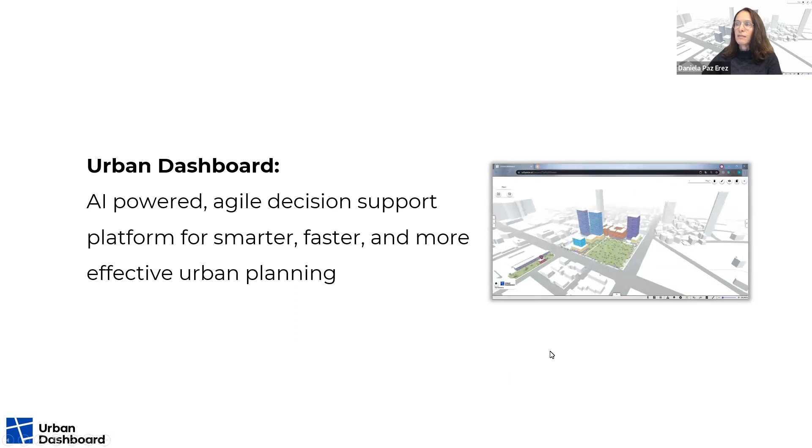So, Urban Dashboard. It is a decision support platform for smarter, faster, and more effective urban planning. Our mission is to empower planners and collaborate with a platform that can help analyze in a very early stage of planning. The platform currently is in an advanced developed stage, and we will talk about what it can do and how. But first, let's talk about the process of urban planning.

The complexity of urban planning is very complicated. The stakeholders are different with different interests - the developers, the state, the municipality, the public. Each and every one of them has different needs, and each stakeholder maximizes benefits from a different aspect. The planner or policy maker that needs to approve the plan must coordinate with all these interests, address everyone, and align the interests. The amount of data and aspects dealt with are huge.

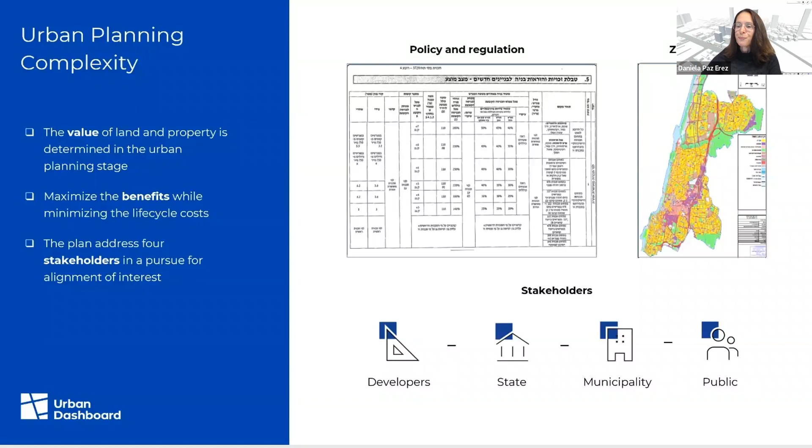And it is going to get much more complicated. The future of planning cities we are looking at is going to be different in a lot of aspects, like future mobility that changes the way we drive and commute. We can look at the future of autonomous cars, electric vehicles, and the challenges of changing the roads because of that. And also the workforce of the future, looking at the mixed use needed because people work from home and need different facilities near their house.

And of course, the housing crisis that's increasing all around the world, and the need to agile the zoning - all of that is creating a huge need and challenging the planners and the people that deal with this stage of urban planning. We cannot think that we can plan the future cities with old tools.

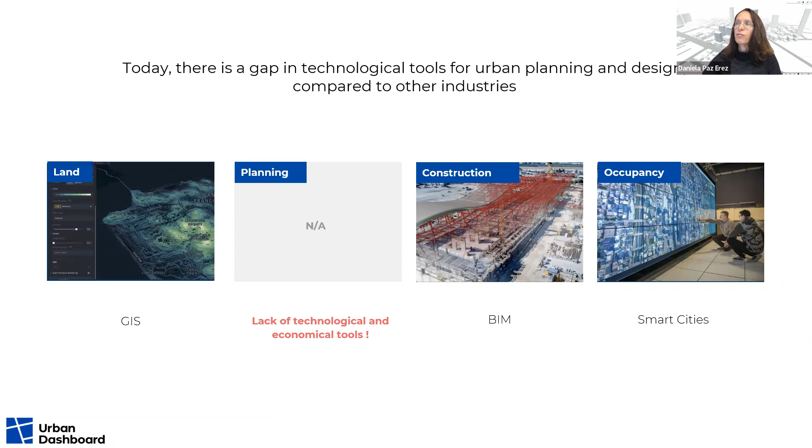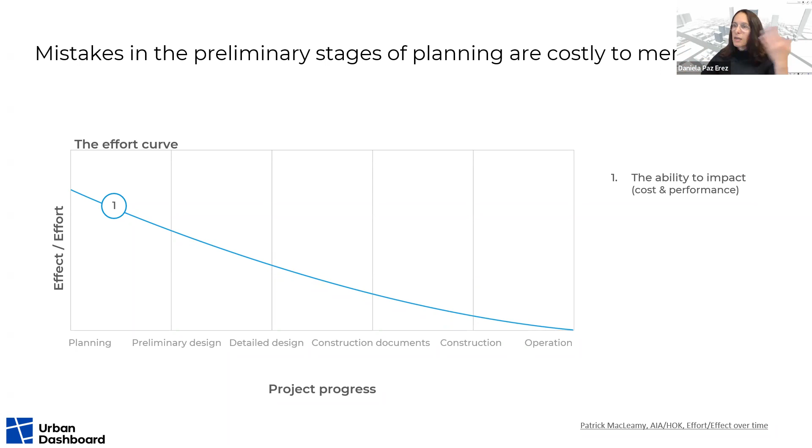Here I want to show you how important it is to use tools, or to know the effect of urban planning, in early stage. Here you can see the blue line that shows the ability to affect at early stage compared to the late stage or the operation stage. You can see that the ability to make changes at the end of the process is almost zero. And at the beginning, we can change almost everything we want, and the cost is almost nothing.

If you want to change the location of a road in the beginning of the process, it means to draft another version by the architect. But if you want to do it after the road was paved, it will cost you demolishing the road and paving another one.

If we see the CAD tools that were used 20 years ago, these technological tools dealt with the construction and the detailed planning, and helped the architects and planners in that stage. In the last few years, we see BIM, building information modeling, 3D models that help the detailed design and the preliminary design stage. And now we want to offer a solution for the early stage, the urban planning stage, when you do only the zoning.

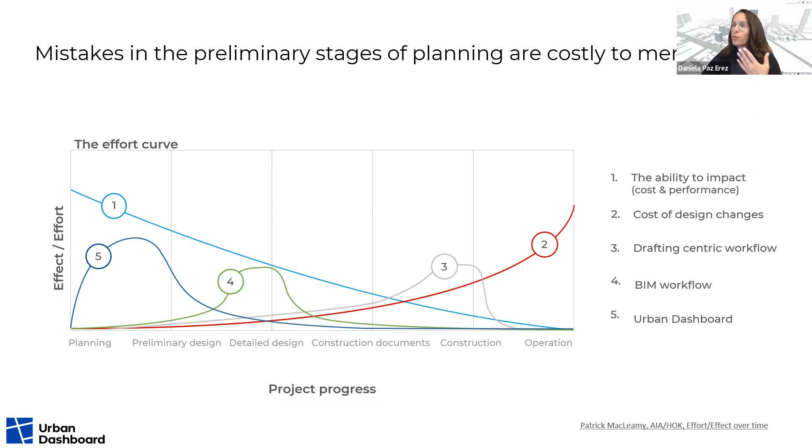Now I want to talk about the cost of urban planning bad decisions, or not knowing the outcomes at the beginning, with two examples. The first one is in Harish, Israel. It is a major new urban center of over 100,000 people, population very large, and needs a new road.

The planners decided to pave a road 50 meters wide on a hilly region, on the side of a mountain, and the cut and cover of the road cost a lot. It doubled the levies, or the infrastructure cost, in this area.

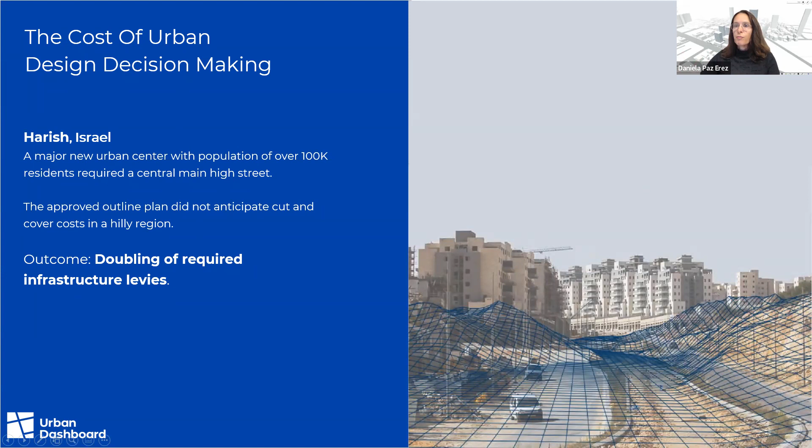We tried to find a different solution by using our tool, Urban Dashboard, and we found that using Urban Dashboard in an early stage would have saved a lot, by changing the location of the road, or a different solution for transportation, like splitting it. This is just one example showing that knowing this at the beginning probably would have changed the way the planners decided to give the solution for the problem of transportation.

Another example is in Kiryat Gat, Israel. It's a city in the south where a new neighborhood of 7,000 units was planned, and the layout was high-rise alongside townhouses. This is a neighborhood that was supposed to give a solution as affordable housing for 7,000 families in Israel.

The government, or the planning authorities in Israel, asked us to try and find a different way of layout in this neighborhood, in order to see if they could save money by changing the buildings that were planned. So we did an examination, and we found out that changing the plan to low-rise, not high-rise, not townhouses, low-rise buildings with the same amount on the same land, with almost the same quality of life, could have saved 20% of the cost of each apartment.

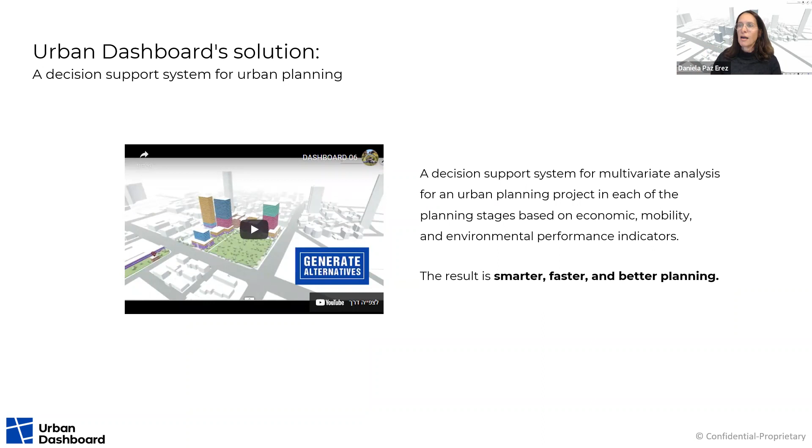I will share a short movie to emphasize how it works.

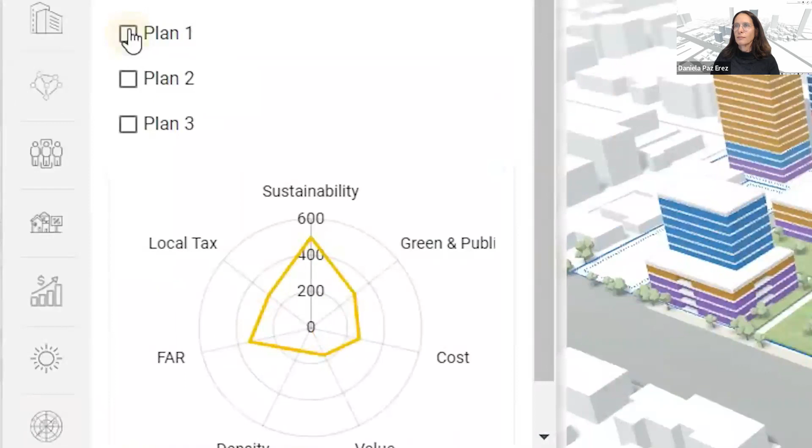Okay, so we want to transform the way cities are planned. And the core features of Urban Dashboard - the first one is the site analysis.

We provide a lot of data layers in each geography that Urban Dashboard can work on, and the user can do a very quick site analysis and find out a lot of regulations and restrictions that are relevant to the plan that is looking at.

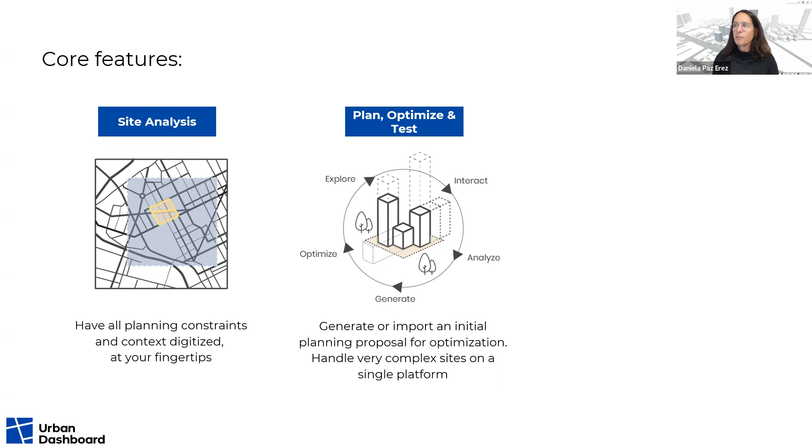Then it can plan on the platform, as you see - Urban Dashboard allows you to plan on the platform and also import your plan, and then explore it, optimize it, and analyze it in a lot of aspects. Then you can see the results for each and every scenario and compare the alternatives, and also present your plan or alternatives to the decision makers or others interested in the results.

In early stage, Urban Dashboard can be used both for developers, urban planners, consultants, managers of projects, and also academy and students.

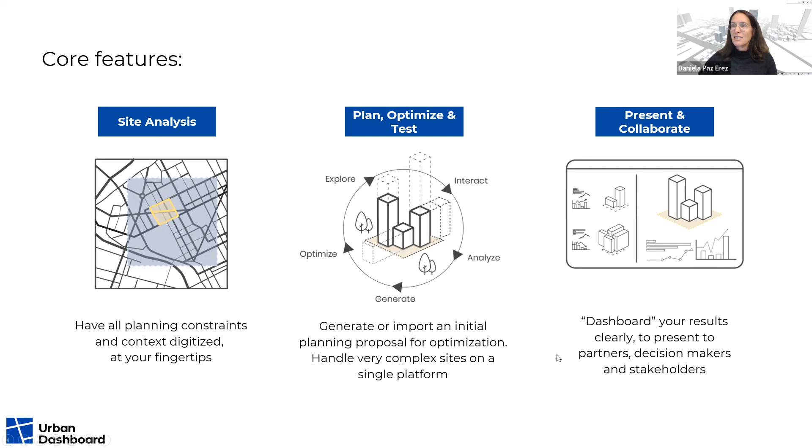The analysis that we are providing has 4 core aspects: economic, mobility, sustainability, and infrastructure. The economic indicators are the construction cost, the cost of parking, the value of the tradable areas, and program for the public needs, and so on.

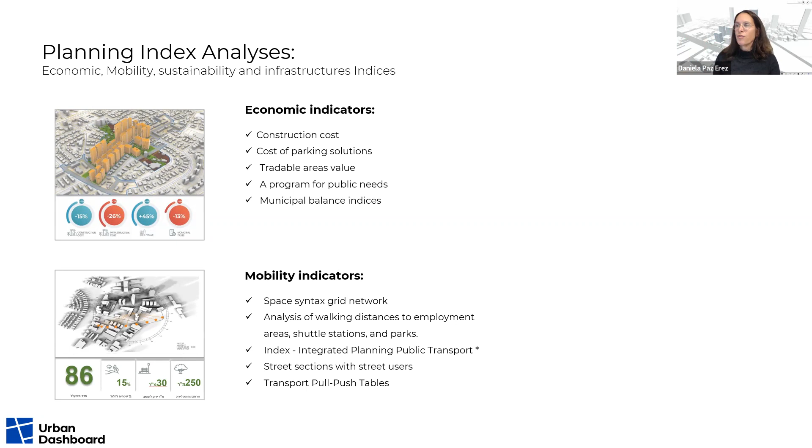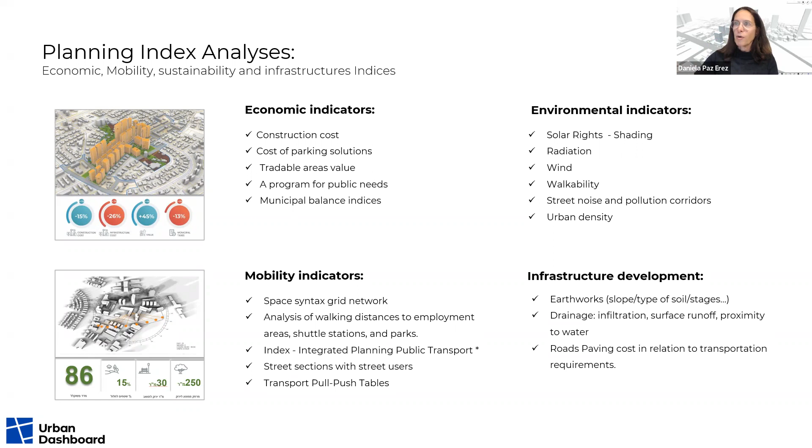The mobility indicators show the space syntax grid network and other aspects of transportation, like a street section with the street users. The environment indicators deal with solar rights, shading, radiation, wind, walkability, and other factors. And for infrastructure development, we are looking at the earthwork, the slope, the type of soil, drainage, and road paving cost. I will talk about it in my examples in a minute.

So in order to understand the power of this tool, I want to show you a few case studies. The first one is the use of Urban Dashboard by a group of planners working on a metropolitan metro system above-ground plan in Israel.

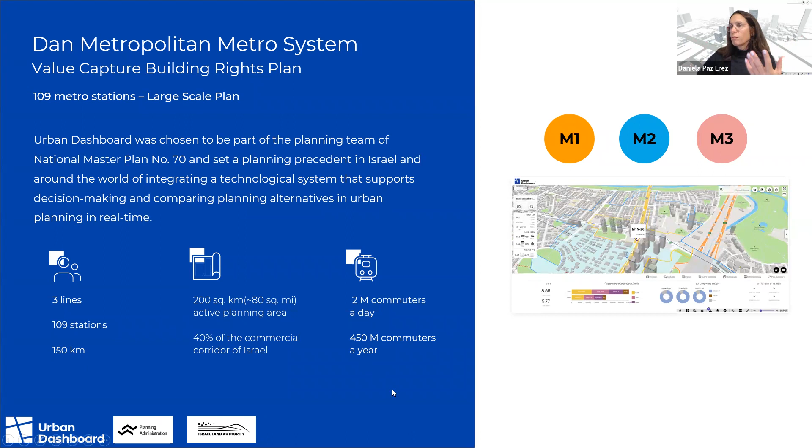In Israel, we don't have a metro. We are just planning it right now: 3 lines and 109 stations covering 150 kilometers. The above-ground area affected by the metro, the immediate area, is 200 square kilometers. It is a huge plan, covering 40% of the commercial corridor of Israel. Urban Dashboard was the platform used to plan and examine the above-ground area.

I will show you one aspect that we did. What you see here is an example of 7 metro stations within one line, forming a cluster. First, Urban Dashboard created a layer of all the parcels, shown below. Then we imported the station centers and the entries of each and every station.

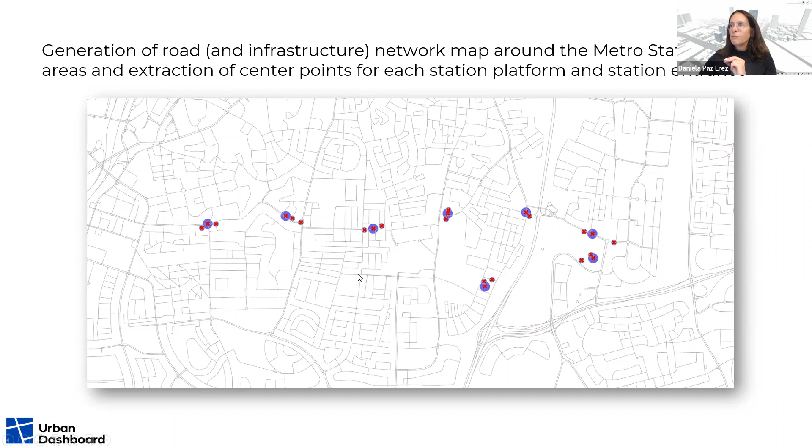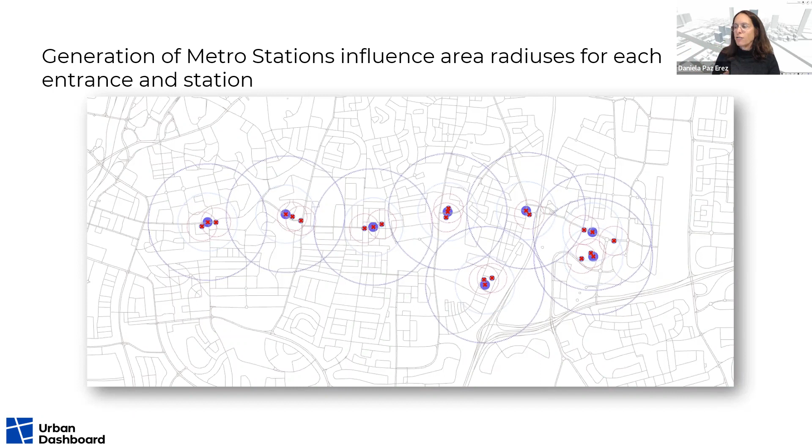Then we marked radii of 300, 600, and 800 meters, and 150 meters radius from each station entrance. We then ran an algorithm that created influence area polygons surrounding each and every station, based on a set of guidelines and constraints regarding the lots and buildings surrounding each station. This was done for all 109 stations.

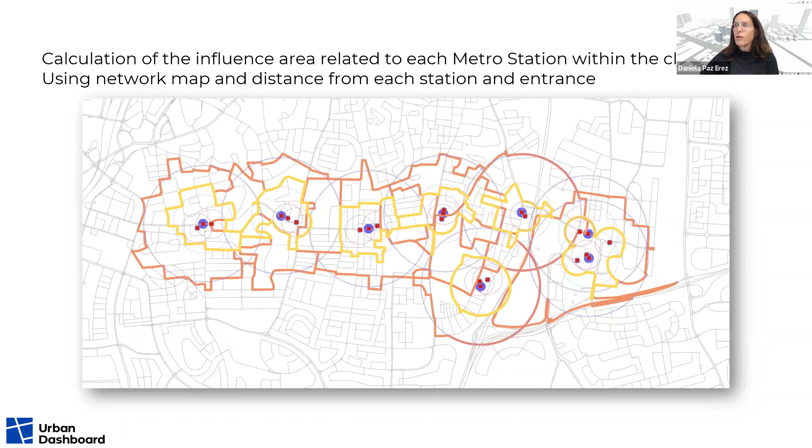I believe that if people needed to do this by hand, it would have taken much more time. It is automatic, and if you change the construction, the algorithm changes the area in a minute. That was very helpful for the team planning the above-ground area. This is only one example of what they did, but the team's work spanned a lot of aspects, and Urban Dashboard was very useful for them.

Without a technological tool like this platform, it would have been very difficult to deal with the huge amount of data needed for a plan like that. The complexity was very high, and Urban Dashboard helped a lot. The result was generating the surrounding area for each of the 109 stations according to all the local constraints and needs of each municipality, and we are proud of that.

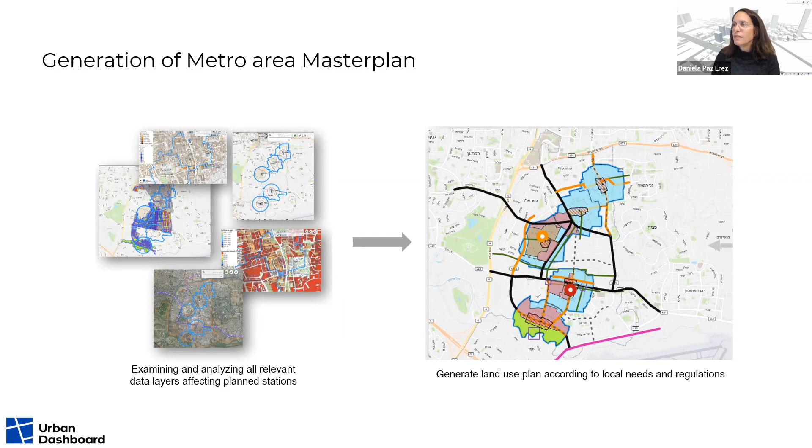Another example deals with water management. A new neighborhood was planned in a city called Or Akiva in Israel. As you can see, a river runs along the development site, making it flood prone. The planning team proposed raising the entire neighborhood by 3 meters to avoid future floods. We ran an Urban Dashboard model to check whether there's another solution that doesn't require raising the whole neighborhood, and we found that yes, we can.

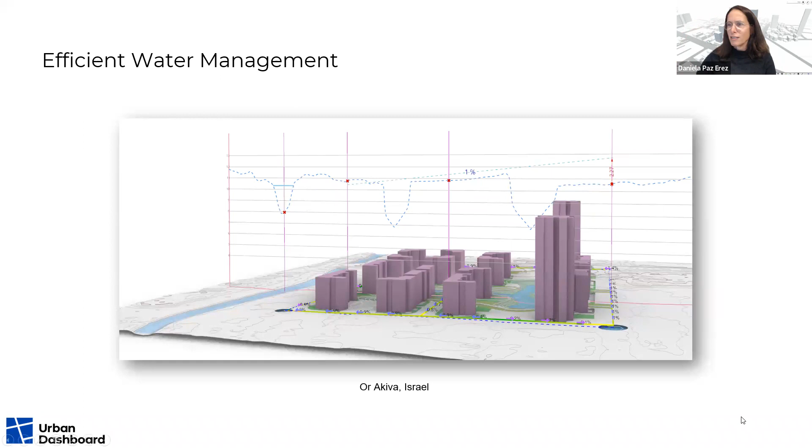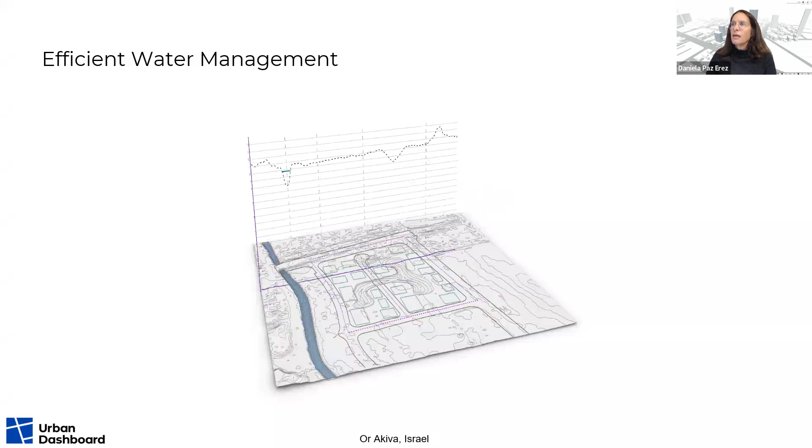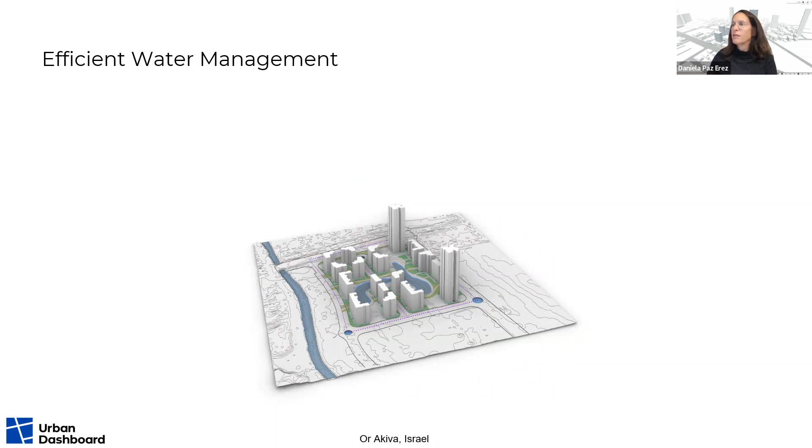Here I can show you the model of what we did. You can see the river and the topography, the flood area, and then after the model ran, we knew how to change the buildings so that the area in the middle can absorb the water.

Another important case study was made for ARIM, a government real estate infrastructure development company in Israel. The goal was to place the marketable lots in the most cost-effective way, taking into consideration the existing roads and the topography.

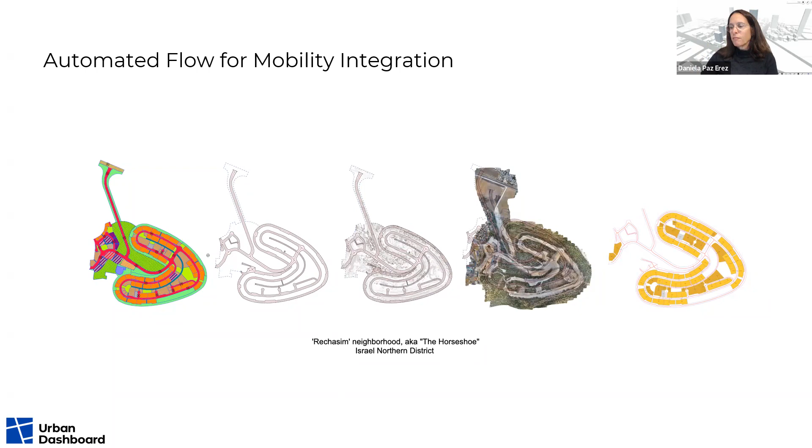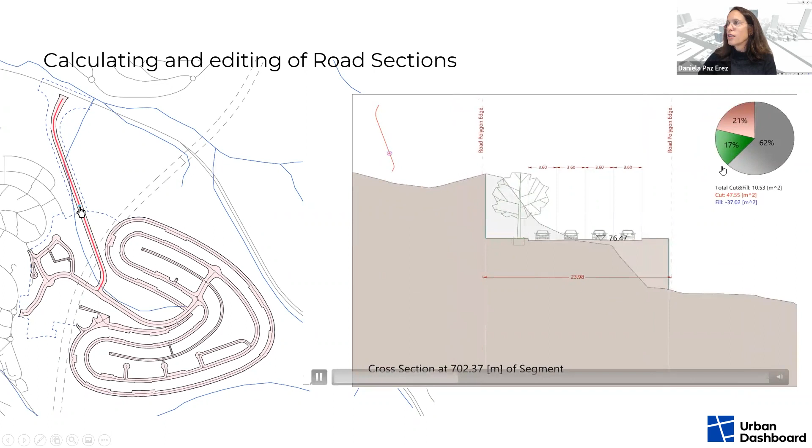What you see here is that Urban Dashboard enabled us to decide the most effective path, taking into consideration cut and fill cost. Here you can see the road, and here you can see the cut and fill needed, the percentage, and also the calculated cost.

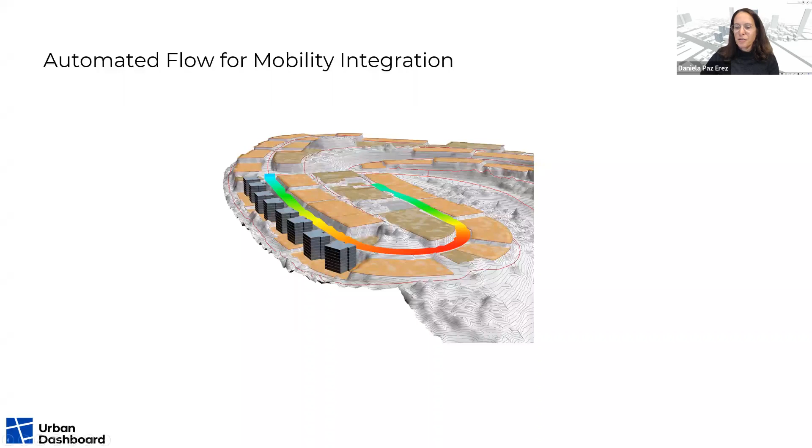And here you can see a demo of the building position by the solution that Urban Dashboard gave for each alternative. So this is another example.

Another core feature of Urban Dashboard, a very cool core feature, is the built volume engine. Once the user fills a few relevant parameters, Urban Dashboard is able to generate building volume according to the topography of the land.

The built volume engine generates and optimizes the 3D model according to each specific lot attributes. And the result is a very efficient design in near real-time experience and minimum user input.

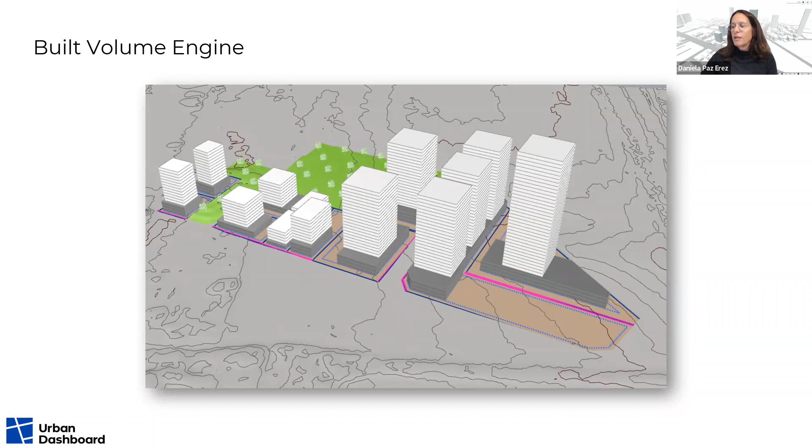Once you have your 3D model, you can use it to do a lot of analysis in an instant, like this environmental analysis of shade and the envelope that the shade is creating on the surrounding.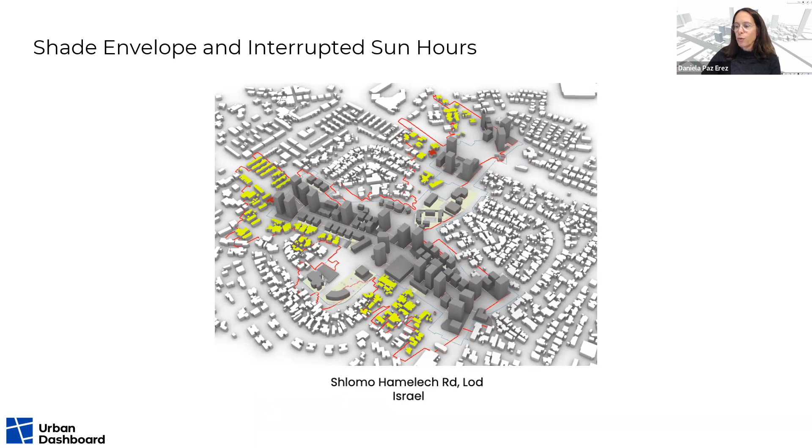And also you can review it and use this when you present the plan to the authorities.

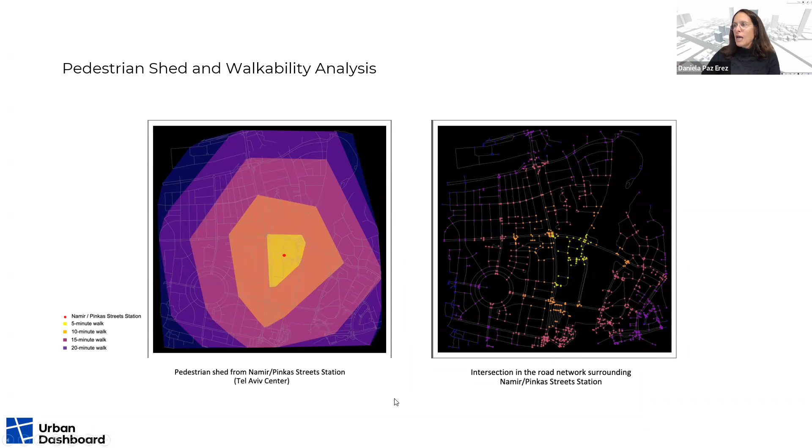Okay, we're getting to the end. To summarize, Urban Dashboard is a smart, chic, very useful platform for urban planning. We're working on a very slick design of user interface, and we will probably release our beta in a few months from now, very soon.

And it is for commercial use, but we really would like students to use Urban Dashboard as a platform for research and use it to analyze existing or planned areas.

So that's why we are very happy for the introduction, and we are ready to hear and see your analysis on Urban Dashboard as well.